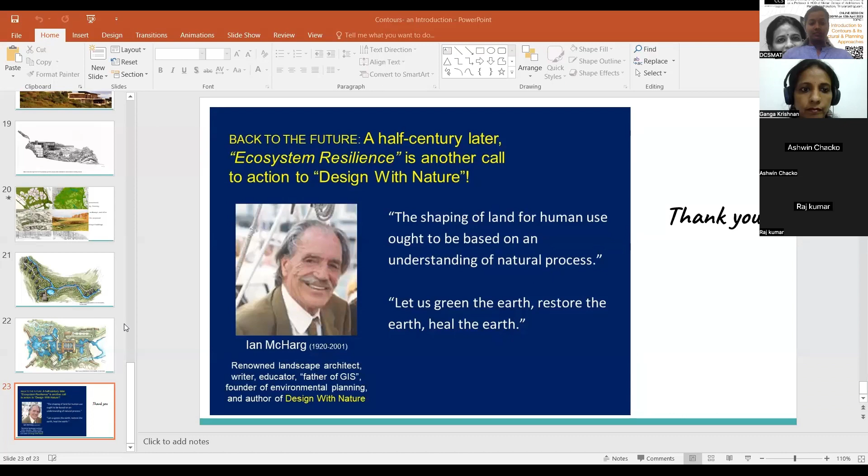Hope the screen is visible to you. Is the screen visible to you? Yes, ma'am. It is visible.

Okay. So, a very good evening to one and all who are present over here to understand or have an overlook about the contours. If only I could meet you all in person, we could have conducted a live workshop with paper, pen, and digital mode, so it would have been more clear for you. But in this short time duration, I'll give you an overall introduction about what contours are, how we have to approach a sloping site, and what are the various methods and approaches while you design in a sloping site. This is just an overview about that.

So let me start. Let us go into the first slide. So initially, a small definition about contour lines. Contour lines is a very familiar word to all of you. Contours are just imaginary lines drawn on a two-dimensional map for ease of our understanding, connecting points of equal elevation. They are mainly used to represent the shape of the terrain which we are dealing with, as well as to represent the elevation. We call the spacing between the contour lines the contour interval. So all these words will be familiar to you.

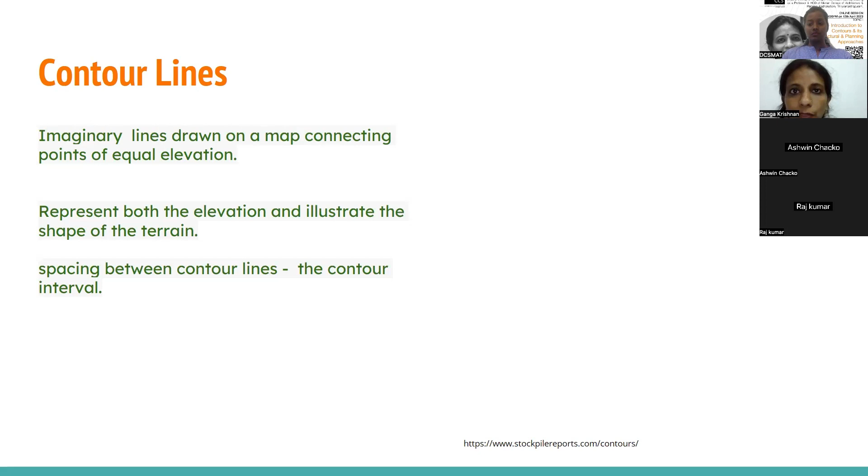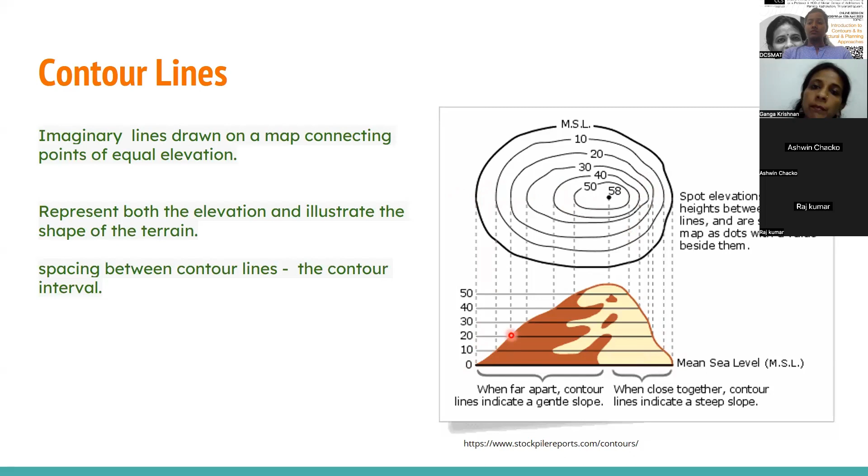So this is a real-time picture which is shown on the right-hand side. Here we can see the contours. Here it is actually sloping towards this, and if we are imagining this as a contour interval of 10 meters or something, then this is how we have to read the two-dimensional picture. Here the 2D is actually superimposed on a sloping terrain.

So how to read a sloping site, or how to understand a sloping site? We are familiar with the term slope analysis. Whenever you are getting a sloping site, the first task is to do the slope analysis. But I will rather say, to understand a sloping site, you have to undergo various layers. You have to understand the layers of elevation or relief.

Then you have to have a basic understanding about the hydrology of the site, and there should be an understanding of the present land use of the site. Then about the vegetation as well as any structures existing on the site. Then aesthetic and visual aspects of the site. Then comes the slope analysis. Slope study will be complete only if we are completing all these layers and analyzing them. Then only the picture of slope analysis will be complete.

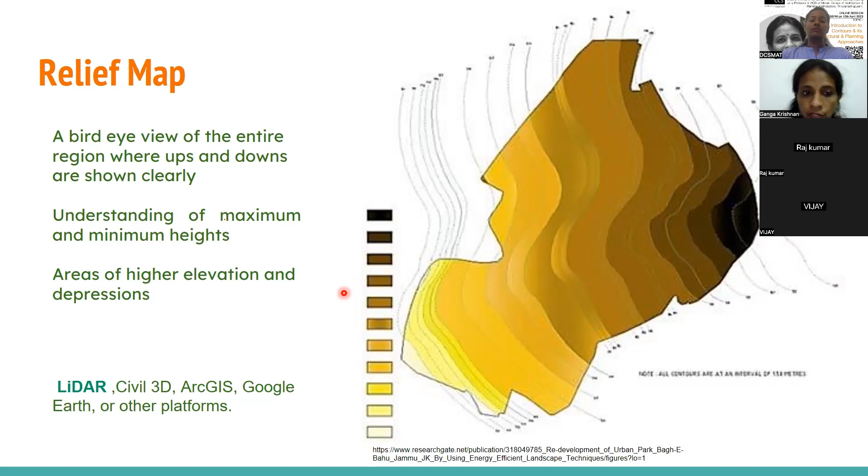So this will give you a clear understanding of maximum and minimum heights in the site, and which are the higher elevations and depressions. So nowadays, there are a lot of softwares available using the platform of GIS. QGIS is a free software which you can deal with. Or then there is ArcGIS, it is a paid software. And you can generate this elevation map using Google Earth, etc.

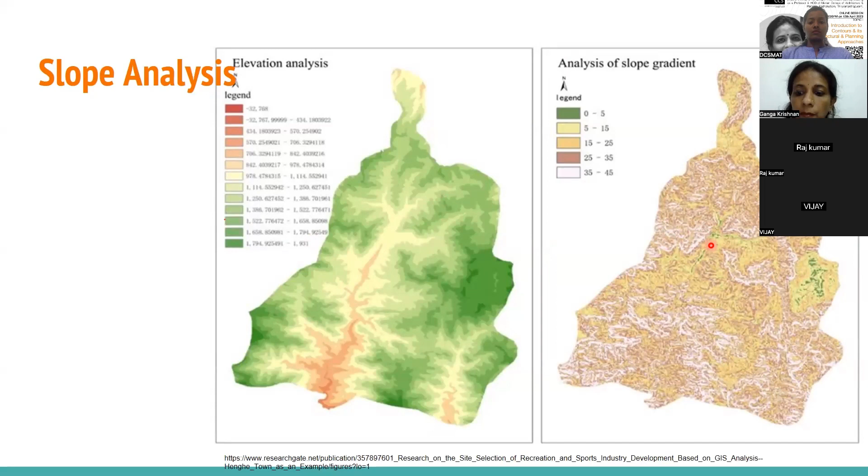So these are the usual images which you are creating from elevation analysis using a DEM model in QGIS. And this is an analysis of slope gradient. So relief map or elevation map and slope gradient map or slope analysis are totally different. So what is meant by slope analysis? Let us see that. Slope analysis nowadays can be generated using Grasshopper in Rhino 6 using the Grasshopper plugin.

And this is a generated map, but usually in the conventional method, we are doing the slope analysis in manual mode. In the relief map, we can see a clear gradation of colors ranging from the lower contour intervals towards the higher contour intervals. But the slope analysis is actually dealing with the slopes in each contour interval based on the distance between the contours.

So suppose in this, this is actually the 30 meter contour, and this is 32. In the 30 meter contour interval itself, there are shorter distance areas as well as wider areas. So here we had seen in the initial image, which I had shown to have a basic understanding of the contour, the spacing between the contours is more. So that means the slope is less. Comparatively it is flat or gently sloping.

But whereas when we are moving towards this area, they are very close to each other, and that indicates that it is steeply sloping. So here, if you are doing it manually or in CAD, you can have a basic understanding about what are the maximum distances between the contours. There will be a maximum distance, and you can have a range also, and this is the minimum distance.

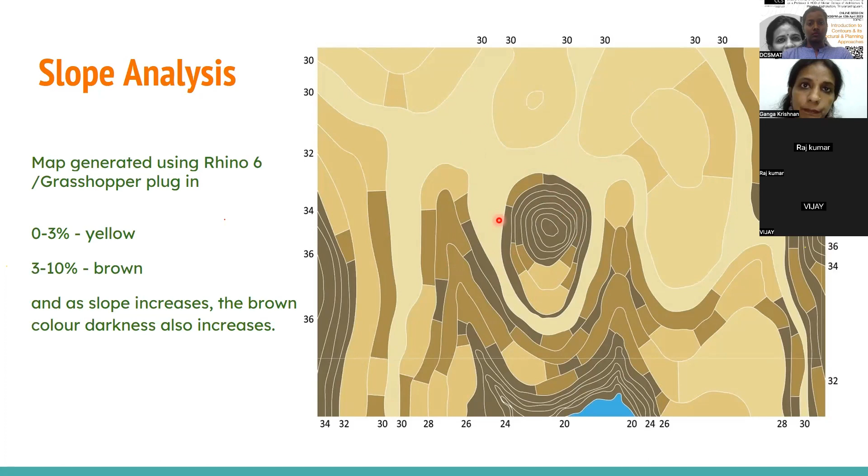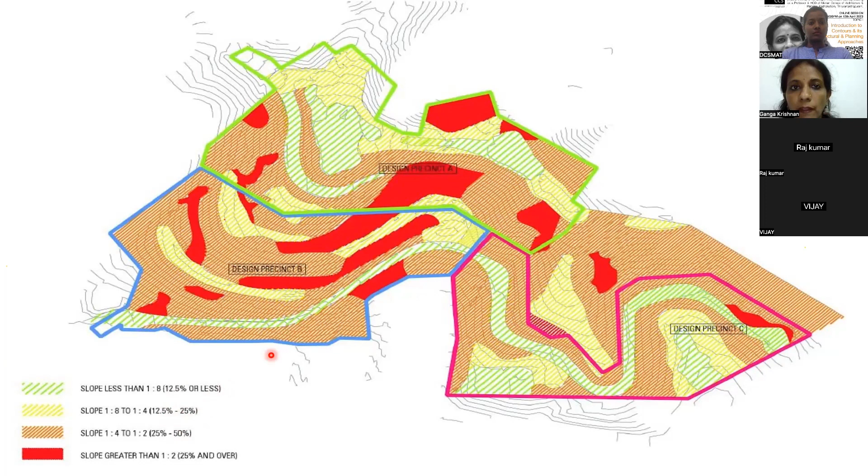Then, before going into details of the slope analysis, how to calculate the gradient, etc., I'll give you a brief introduction about the drainage map also, because drainage and slope are closely associated. Based on the ups and downs on the site or region, the drainage flow will be there in the site. It is very important to understand the natural patterns of water surface drainage in a site.

And we have to look into three primary concerns while dealing with the drainage map. The first concern is determining where the water is coming from. Maybe if your site is only this much area, the water would have come from other sites also. So when considering a sloping site, you should not look only into your area of interest. The nearby context is also very important while you deal with a sloping site.

So whether the slope is going up, or there are higher elevations nearby, the water will obviously flow. The natural pattern is like that. Water will obviously flow from the topmost areas to the lower areas. So there will automatically be a natural drainage pattern which would have been created long back, because the weaker strata will get eroded fast, and those areas will be a path for the water to flow.

And over a period of time, the water will again cut. When the velocity of water is more, it will cut the pathways or the flow ways, and the depth of that channel will be more.

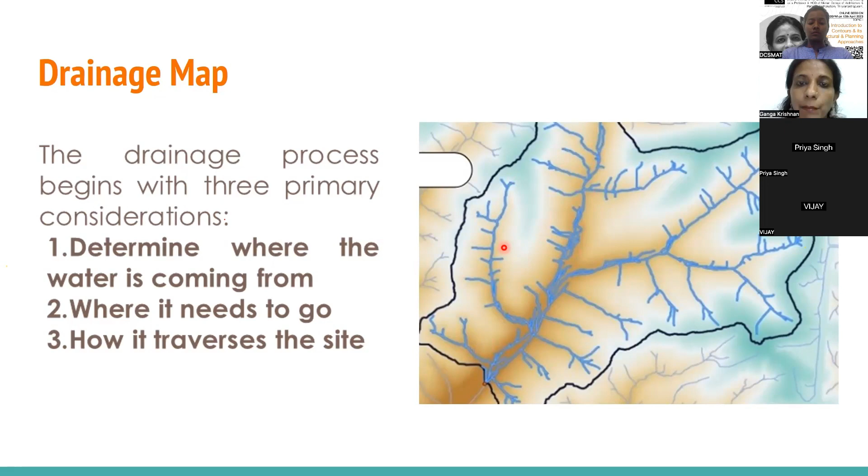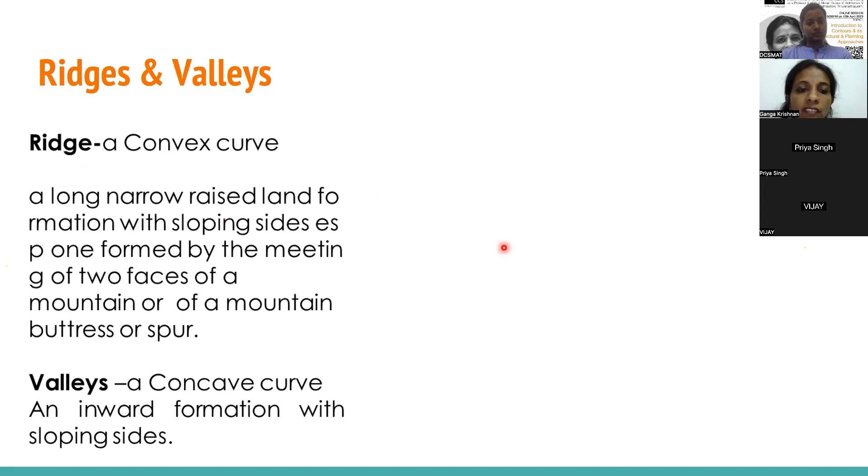So what is meant by ridges and valleys? A ridge is a long, narrow, raised land formation with sloping sides, especially one formed by the meeting of two faces of a mountain or of a mountain buttress or spur. Valleys we can usually call a concave curve, that is an inward formation with sloping sides.

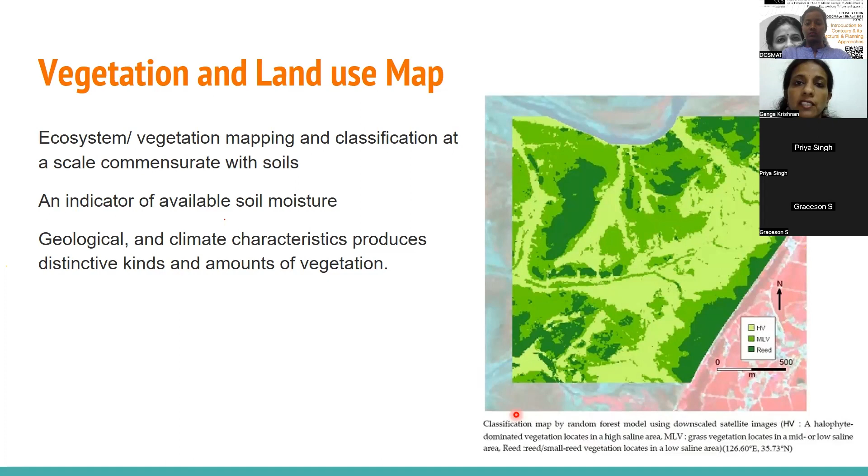So this is a vegetation map generated using Landsat images. And you would have studied earlier in climatology classes, like the windward side, etc. So usually on that side there will be more vegetation, as you could have experienced. This is taken from the internet.

It's a project which had shown each area of the site and how they are dealt with based on the topography as well as the proposed land use. Vegetation is interconnected with the proposed land use also. What is proposed over that area? Based on that understanding, you can give a detailed analysis of what sort of vegetation will go there, what sort of protection to reduce the intensity of the sun's radiation, which areas you have to make buffers, and which areas you have to strengthen vegetation and make it a berm to screen unwanted views.

If you wish to screen the views from the site, because if it is a sloping site, there will be tremendous views flowing towards various portions of the site. So whether you want to discard some views, get some focal points, or invite some views to the site, these are all possible through the playing of vegetation and landforms.

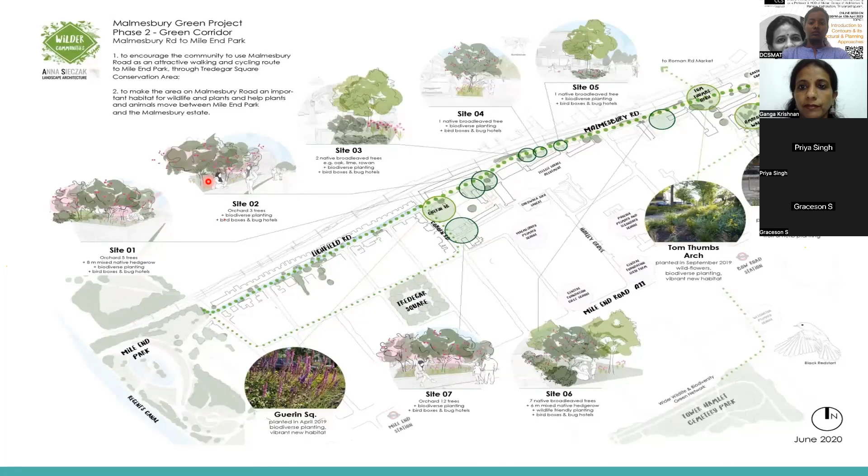Then comes the detailed portion of grading, which is after I have an understanding about your site, after doing this detailed study of the site. Apart from this, since you are not geologists, I didn't deal much with the soil part. So after having a clear understanding of the relief map, slope map, hydrology or drainage map, then vegetation and land use, you will get a clear picture of what your site is.

So you would have pointed out the issues you identified in the site, and you collaborate the issues with a basic understanding of the site based on these existing natural features and the proposed use of the site, whether an institutional building, a hospitality project, or a residence is coming up on the site. Based on the proposed land use, the relationship between use factor and site factor, you have to analyze the site. The site analysis will be a combination of use factor as well as site factor.

Whenever you analyze the sloping site, you should keep in mind that both site factors and the proposed land use will be important. Only then can you analyze and understand. Based on that, you can start grading or develop a grading plan. Before going into a grading plan, we should have an understanding of what is meant by grading and what it is used for. What is the purpose of that?

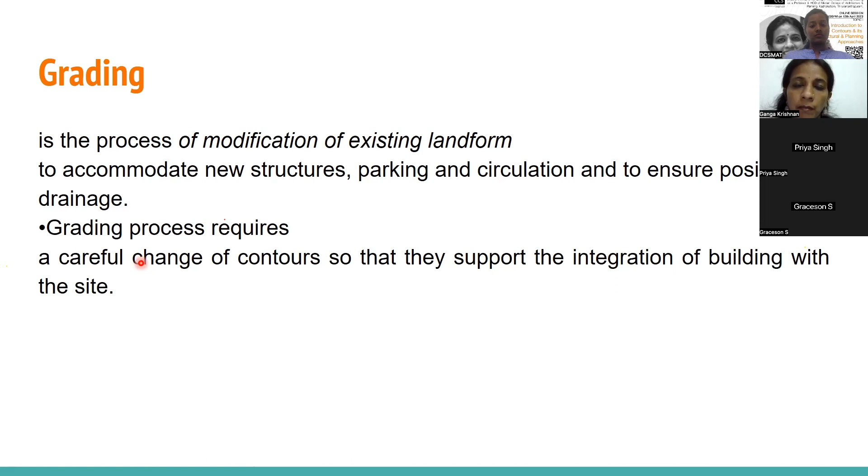Because obviously when a project is about to come on a site, modification of the site happens. So you have to modify the contours or grade the contours, but it should be a careful process. Otherwise, there are chances of landslides, massive soil erosion, flooding, etc. After doing the grading, you will get the desired effect you want.

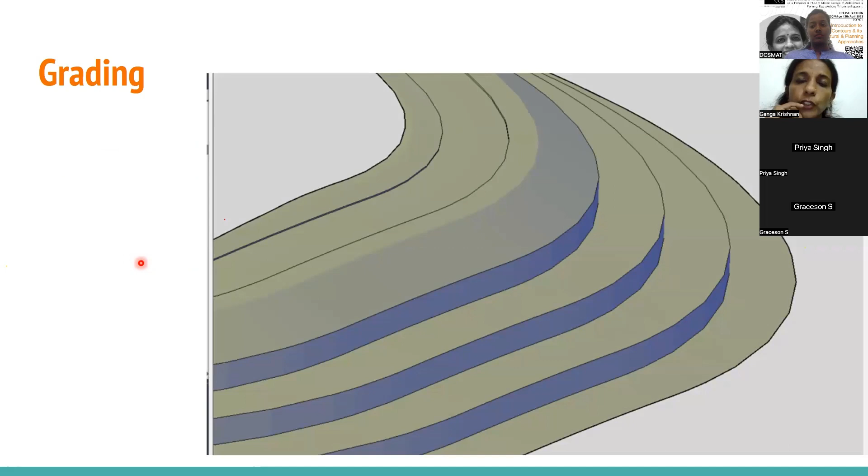If you have been to IIM Bangalore, you would have experienced the amphitheater and its views. It is placed on a slope, utilizing the slope to place the seating. And what are the three principal goals while developing a grading plan? So the main aim of that

of developing a grading plan is to keep unwanted water from entering a building, restricting water entry to a building, then keep the surface runoff from creating damage to property or people during periods of heavy rainfall as well as subsequent runoff. So you have to properly give drainage ways to drain the water away from your property or useful areas.

And you can think about various plans, whether you have to harvest the water, whether you use it as a feature in your site, or whether you make it a seasonal or temporal variation in the site. That is according to the designer's viewpoints or considerations. Then, to accommodate the structure on the site while disturbing the site to a minimum. That is, minimum disturbance to the site. That should be the motto when a designer approaches a sloping site.

But in contradiction, we are experiencing, mainly in Kerala, that every sloping site is getting chopped off, and it is like a cake, when a cake has been cut from the base, it looks like that. Every side looks similar, and buildings are constructed on that. And behind that building, there will be a huge cliff sort of experience. The slopes are not utilized properly.

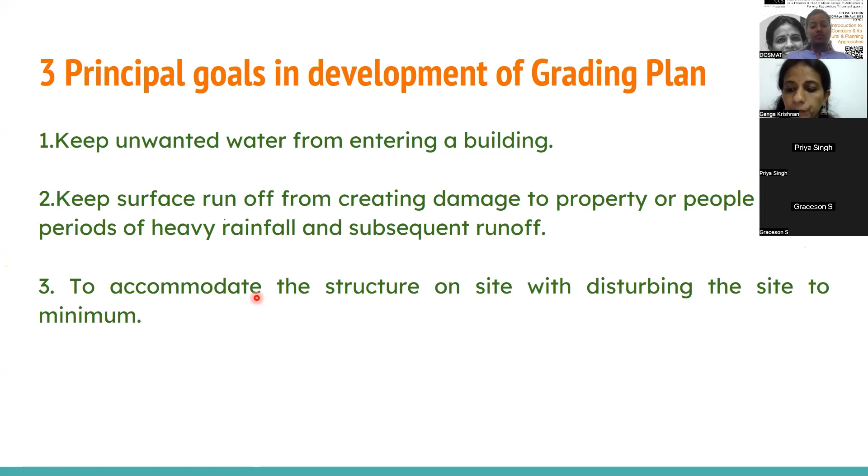While modifying the contours, you have to understand that if your building footprint is like this, you should have a clear space around the building, unless you are constructing a retaining wall. If there is a retaining wall in this area, in the lower level, you can't give a maneuvering space around the building, because the building wall itself may be acting as a retaining wall.

But on this side, suppose it is sloping towards the lower areas, and if there is sufficient open space which you can provide, then give some space on the sides of the buildings where it can be accessed, so that people can move towards this side for maintenance or any other purpose, as well as open the windows, or develop the spaces, make them spacious, etc.

Then what is meant by grading, how it is expressed, etc. That is, it refers to the changing elevation along the Earth's surface, or the rate of the slope, usually expressed in percentage or ratios. Degrees are used only in the case of a large-scale or regional-scale project. Usually we express gradients in percentage or ratio.

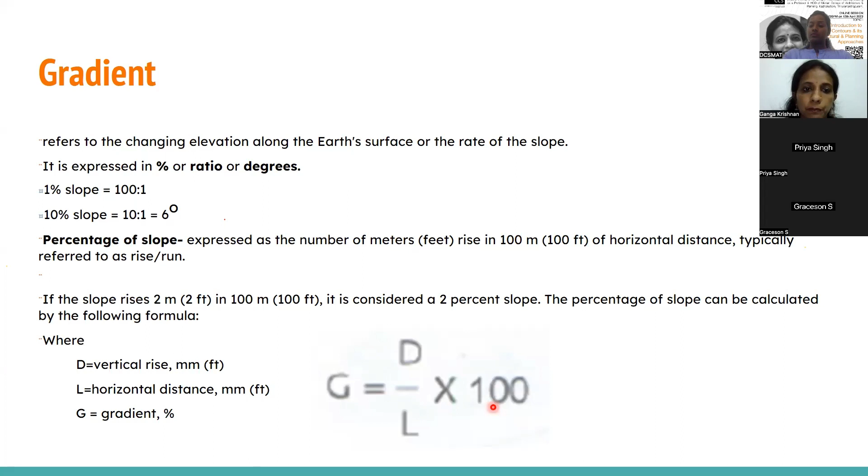If the slope is steep, that is over 50%, it is susceptible to erosion. Then that slope has to be protected, and it can be planted with grass species, mainly vetiver. Vetiver grass, in Malayalam, is called Ramacham. If it is 3 feet high above the ground, its roots will be 10 feet deep. So it is actually a soil binder. In Konkan areas, on the sides of the railway lines, it has been widely planted to stabilize the slopes.

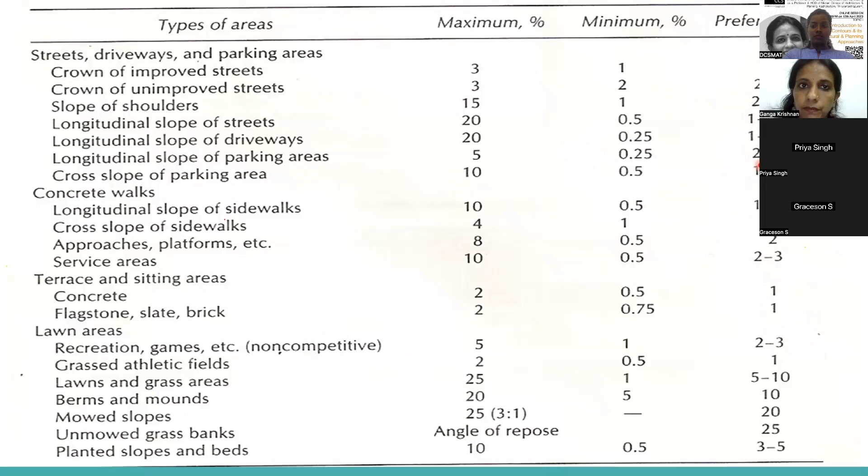Then the grading for streets. What are the considerations while grading streets and roads? The road has a constant slope and that presents more problems. The function of the road is to serve as a path for vehicles, and it will also take care of the drainage system. So while you design a road on a sloping site, it should minimize the fluctuation across variable terrain, maintain a constant gradient, and provide the shortest route possible.

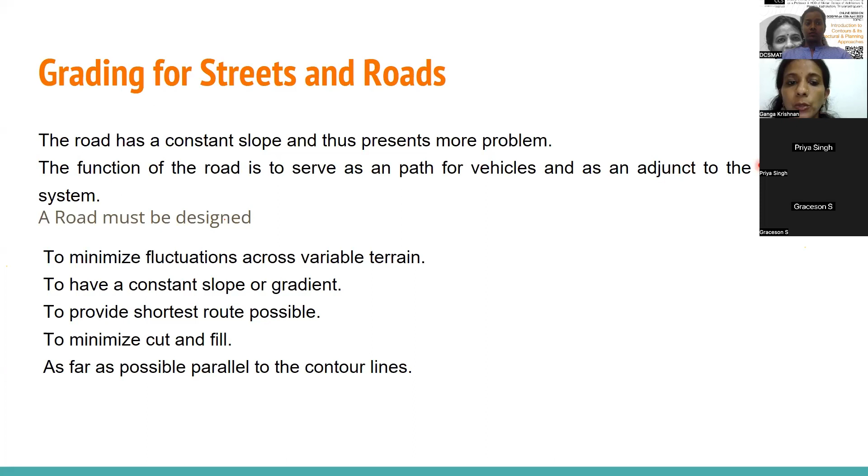Think about minimizing the cut and fill on the site while developing the roads, as far as possible parallel to the contour lines, because if the slope is steep and we are not following the contour lines, there will be a lot of cut and fill happening on the site, and it will create a massive imbalance on the site.

So if you are designing a resort project on a sloping site, if you give a road in the middle and arrange cottages on both sides of the road, you can reduce the impact of roads on the site. On one side the cottages will be in slightly elevated areas, and on the other side it will be flat or generally sloping downwards, but the same road can serve the buildings on either side.

I gave an example of a resort building. It can be in any case: if you are planning the buildings on either side of the road and achieving the levels so that on one side the terrace can be accessed, those sorts of design considerations, while developing a sloping site, will be helpful to minimize the impacts on the site.

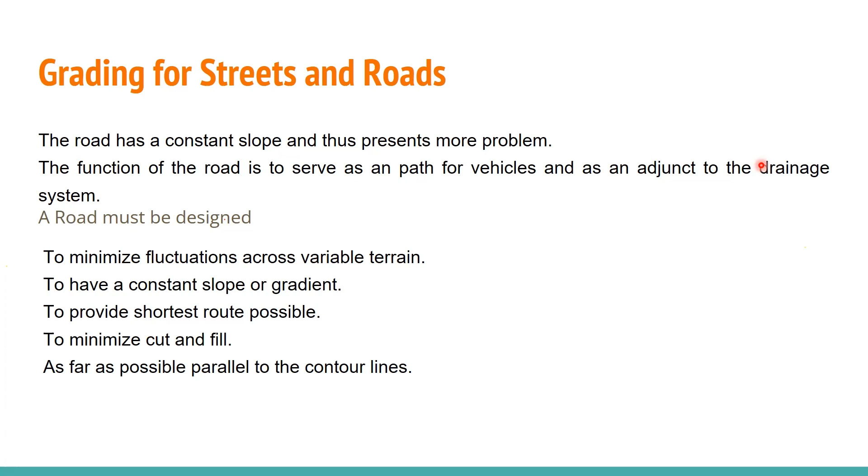Instead of what we can call the gray infrastructure, which is constructed infrastructure, that is constructed drainage, etc., this can be a sort of green infrastructure by giving a sloped grass base. The water is collected in the drainage swale, and it gives visually pleasing outlooks to the people driving through the areas, instead of creating a monotonous appearance, which is a major concern when our highways are getting developed.

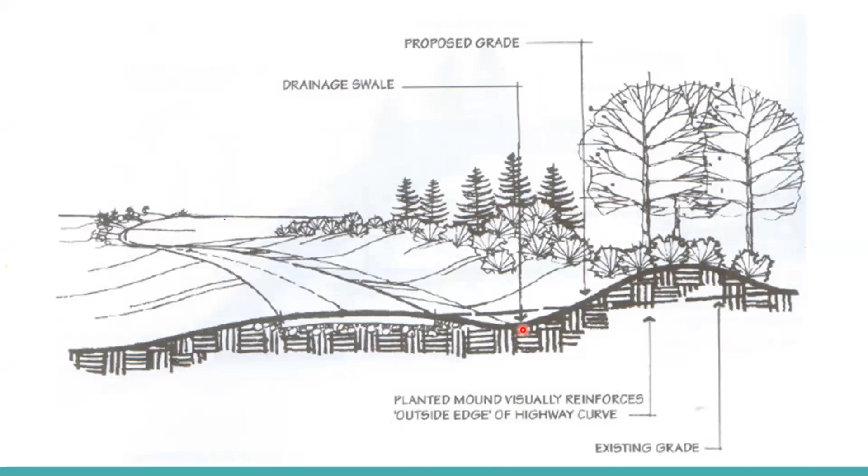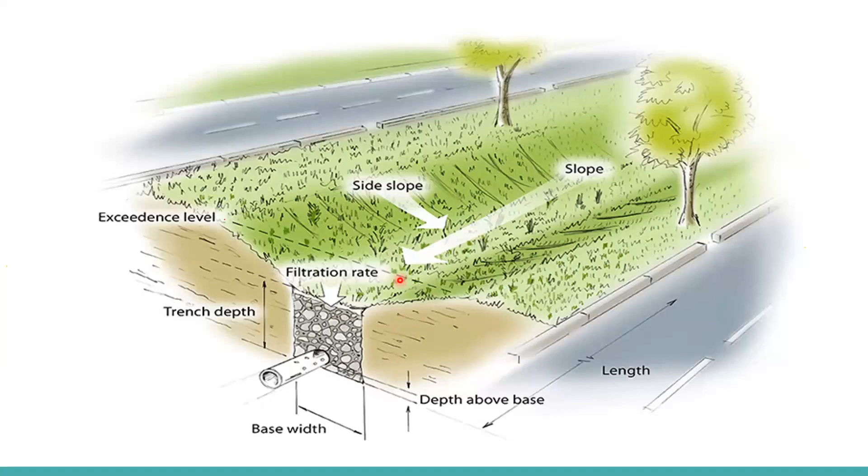Then there is also another thing happening, that is grading around a building.

Grading around a building, when we consider... do you have any doubts regarding these topics? If you have any doubts, you can clear them and we can go to another slide. Does anyone have any doubts? No, ma'am. Okay, so I'll continue.

Usually when you experience parking in the basement of commercial buildings or shopping complexes, you would have seen a drainage before entering into the basement parking area. That is to prevent the water from flowing into the interiors of the building. So that should be taken care of properly. Usually when I design, I give a drainage channel before entering into the ramp, and where the ramp ends also a drainage will be given. Otherwise, the amount of water flowing down the slope we cannot control. It might overflow into the building interiors.

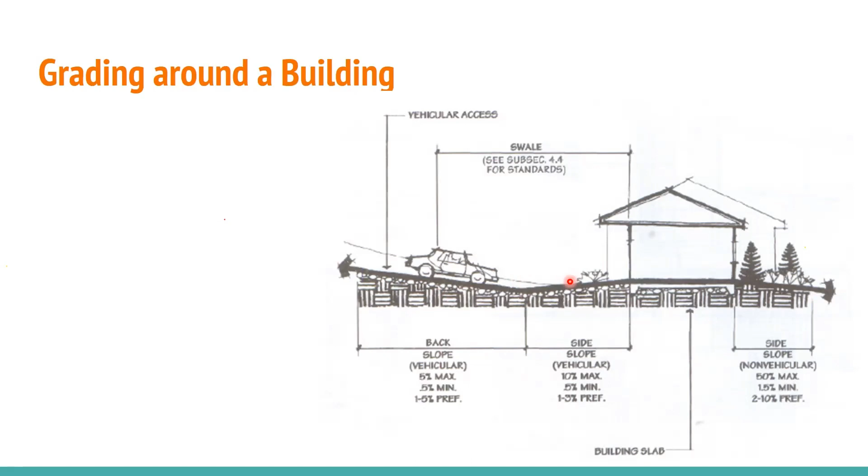So there are design considerations. What design considerations should be given on a sloping site? The major concern in designing a building on a sloping site is what type of foundation we can give and how deep it could go, because usually on a sloping site the foundation will be deeper. So how to screen the view of that foundation and how to stabilize the slope is a major concern.

So in those cases, we have to take consultants, mainly the structural consultants; they will help. You should have the basic understanding of how the building should be sited, and they will give assistance on the foundation: what type of foundation, how deep it should go, what the retaining wall thickness should be, etc.

Then another concern is accessibility. How to access the higher level. So the levels you have to utilize. If you are entering from the road in this area, then on the sloping site it will be going downwards. So this will be a viewing area or the living space. That sort of planning, how to design levels on a sloping site, you have to think about, instead of the normal notion of coming into a ground floor, then approaching the top floor.

It might change. There will be variations in our thought process, and you have to deal with those spaces carefully. Only then will you get the desired effects in a sloping site. Otherwise, it would have been a trauma also. So that sort of detailing in sections, you have to think about sections and views, etc.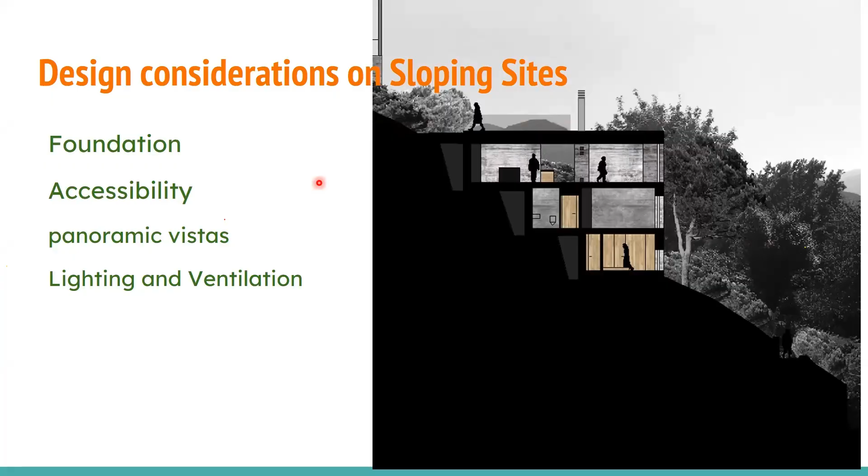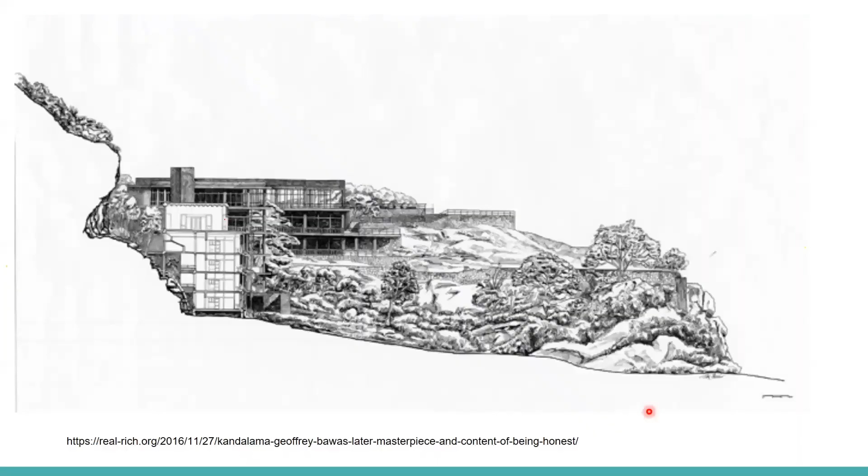These are some examples which I have taken from the internet. How buildings are beautifully sited along with the sloping topography, instead of cutting and placing. This is actually merging. Then this is the Kandalama hotel of renowned architect Geoffrey Bawa. Geoffrey Bawa actually utilized the slopes and provided spaces according to that. So the building is not jutting out.

Usually architects or designers, or clients, have the notion that the building should project out. But we are actually constructing the building on the natural fabric. So it should not be standalone, or in some cases it has to, but in most cases it can actually be a part of the nature or the setting it is in. That sort of concept is beautifully portrayed by Geoffrey Bawa through his buildings.

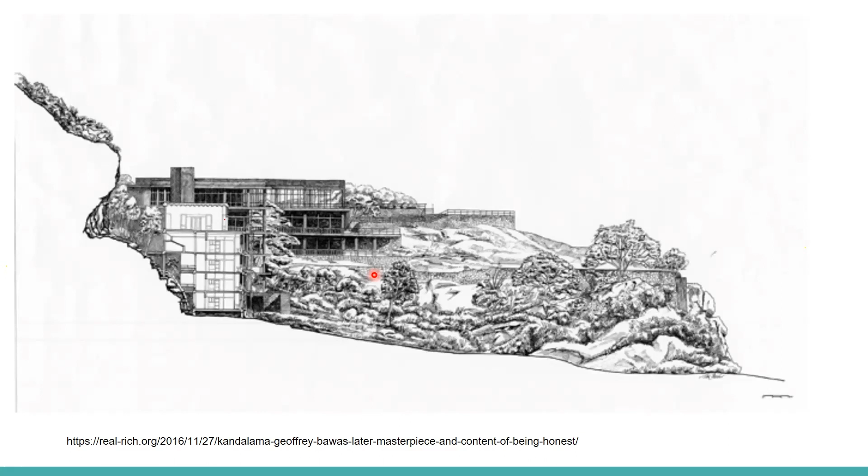And here comes the significance of master planning. So what is master planning? Why is it more significant? While you deal with an architectural project, a lot of discussions happen about the planning of a site or master plan. Usually it gives the connection between the building as well as social settings and their surrounding environments.

So it includes analysis, recommendations, and proposals for a site's population, maybe the future population which will be using that site, economic aspects, housing aspects, transportation aspects, community facilities, neighborhood, proposed land use, etc. Landscape architects usually create detailed plans indicating the modified topography, then vegetation, what type of vegetation, where it should come, how it should look, then walkways and other details of the landscaping, then stormwater drainage, integrating art and cultural elements, etc.

Then the output is actually a comprehensive land development plan, which outlines the site with suitable locations for the proposed architectural project. The comprehensive land development plan will have the grades, how the grading has to be done, where the roads should be laid out, where the buildings can be sited, the possible drainage areas, etc., and where the retaining walls should come up, and where the land can be stabilized with the natural slopes or planting, etc.

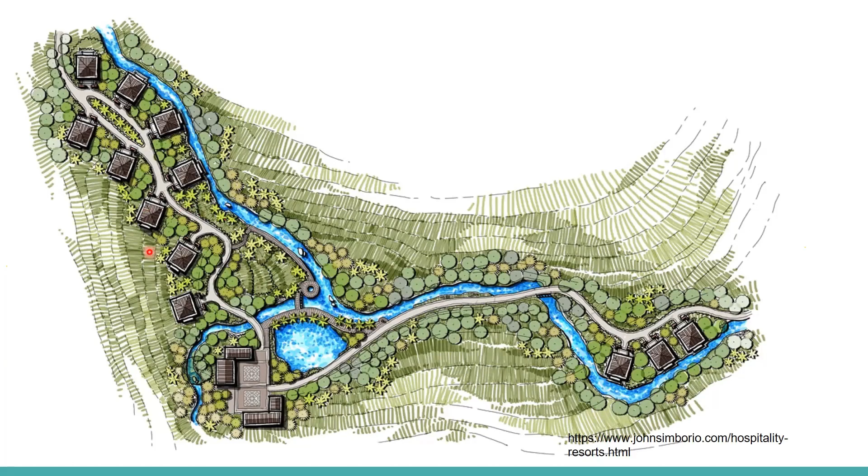This is actually a resort project, also sourced from the internet. Here the cottages are placed along the sloping site, on either side of the road. So it gives minimum disturbance to the sloping site. Then there is a waterway going through this, and the sloping site is utilized for creating a panoramic view from the cottages as well as the siting along the slopes. This is another master planning project.

So this is the end of the presentation. I'm taking the words of Ian McHarg, a renowned landscape architect who is known as the father of GIS and founder of environmental planning, and author of the famous book Design with Nature. He said that the shaping of land for human use ought to be based on an understanding of natural process. Let us give to the earth, restore the earth, and heal the earth.